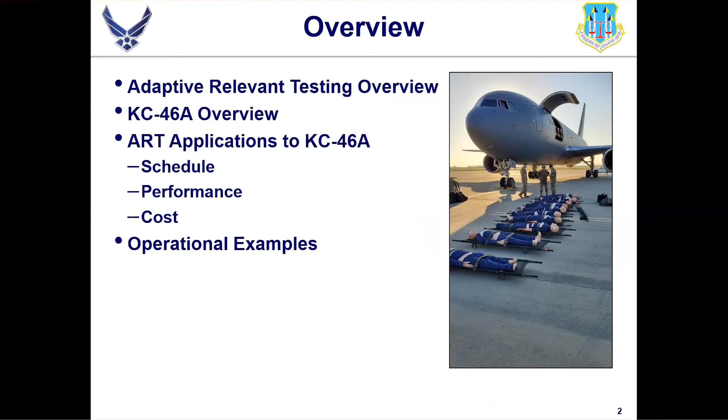So the purpose of this brief is to go into detail about adaptive relevant testing and talk about how the KC-46 team has used these AFOTEC principles in order to deliver capability faster to the warfighter at a cheaper, more efficient way compared to traditional methods. The traditional method I'm talking about here is essentially black box initial operational test and evaluation, where we wait till everything's ready. We go to test for 6 months. No one hears anything. No one gets any data until it's all finished and published in a final report. And then fixes can be made. So that's the traditional method - that's how we're trying to go away from that, and we're trying to use ART principles to do that.

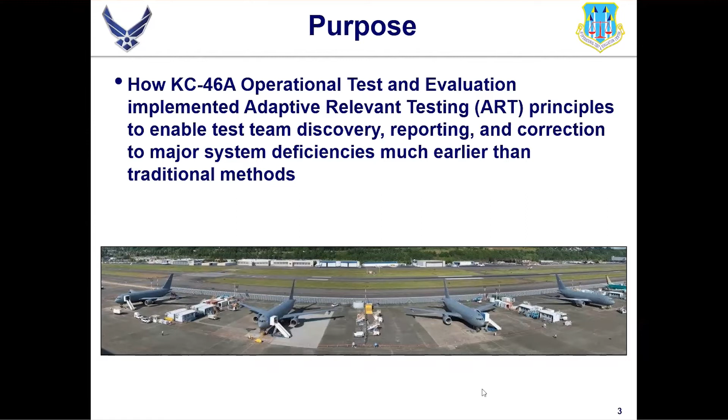So to start with, you're going to hear me talk a lot about the DT mindset and the OT mindset. Just kind of a blanket statement - developmental test, in my opinion, from an operational tester's view, is much more focused in the weeds, maybe not in the weeds, but they're focused on smaller minutia things.

They're looking at the capability production document. They're doing verification, saying does the boom fuel flow meet the criteria we set about when we wanted to build this weapon system?

Whereas the operational test mindset is much more of an operator and aircrew, mission-focused mindset where we're validating and saying, can we perform the mission? Rather than what was the fuel flow on the boom, were we able to give fuel in an operationally realistic time frame in order to complete the mission?

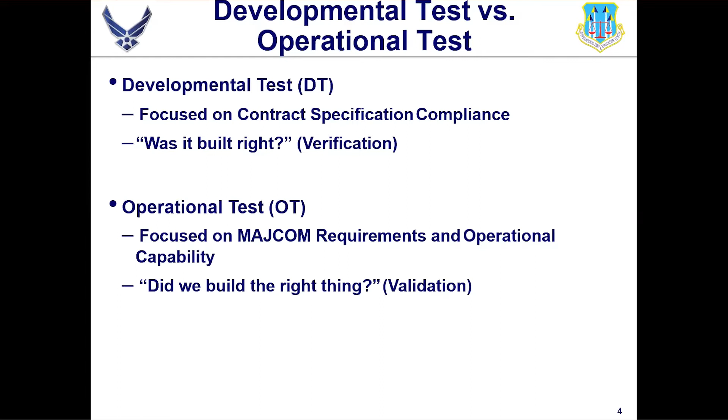So you're going to hear me talk a lot about the DT versus OT mindset during this brief, and that's kind of what I mean.

To begin, AFOTEC ART is based off of the 2018 National Defense Strategy from General Mattis, where he wanted acquisition programs to deliver performance at the speed of relevance. So you're going to hear me talking about delivering capability faster and smarter, as you see on this left-hand chart with this triangle, under the acquisitions framework of cost, schedule, and performance.

So to deliver speed of relevance with high performance, we want to discover problems early on that left-hand side. By doing that, we're going to allow us to fix problems earlier, which means we're going to deliver better performance to the warfighter with the combat capability in the middle.

On the right-hand side is kind of our cost side. We're going to reduce costs, and the way we want to reduce costs is we want to find these problems early. It's a lot cheaper to fix issues when, say, we only have 3 test aircraft to fix a problem on compared to a fleet of 180.

You've probably seen in the news that the KC-46 is replacing the boom, or the vision system. Programmatically, it's way cheaper to fix 20 aircraft than 180 aircraft. And that's kind of where the cost aspect comes into play.

Then the bottom triangle is the schedule part of the acquisitions triangle. We want to test earlier, faster, and smarter. We want to get the weapon system to the field faster, at a lower cost with higher performance compared to these traditional methods we've been using.

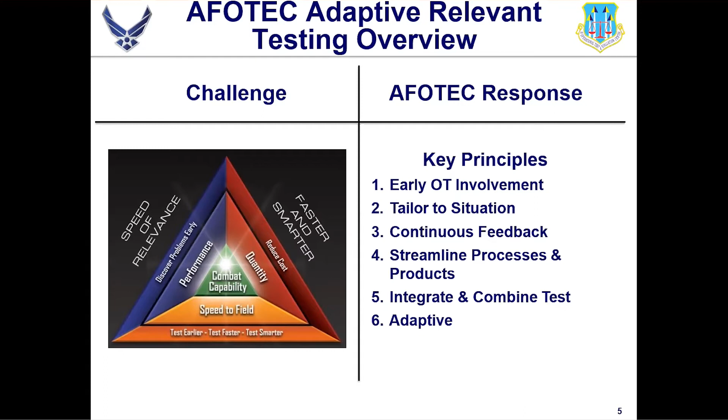But ART is really AFOTEC's goal for answering the national defense strategy of delivering capability at the speed of relevance.

So talking about the KC-46 now, just a brief overview. This picture here on the right-hand side is the concept of operations for the KC-46. Every acquisitions program in the Air Force gets one of these. Basically it's an overview of what we want the jet to do in picture form.

So we want it to do aerial refueling. We want it to be like a KC-135, which you'll see on the bottom, but we want it to be an enhanced version of that. We want to do airlift, have cargo and passenger airlift, and do aeromedical evacuation as well.

The key here that I really want to foot stomp, that's going to bring AMC and the tanker community into the 21st century, is all of the lightning bolts on the screen. It's our command and control aspect, our situational awareness—basically we want to have a pseudo AWACS mission set along with a KC-135 mission set.

That's what really separates the KC-46 and brings this enhanced mission concept: it's a tanker that does everything legacy tankers do, but also has all these new situational awareness and C2 capabilities that it can share not only with the Air Force, but jointly with the Army, Navy, and other friendly military partners. So that's the goal of the 46—it's a tanker plus.

And that's coming from the C2 aspect of it.

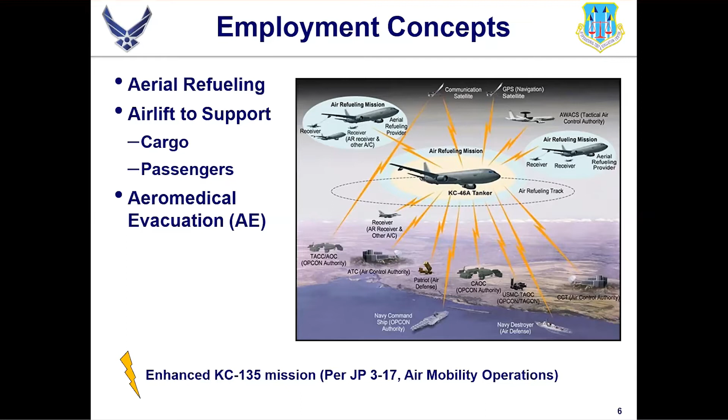Going into our test design a little bit, we use standard DOE methodology. We have 5 critical operational issues that I'm going to talk about here in a little bit, but each one of those 5 COIs are their own experiment. Each experiment has an 80% power level with a signal to noise ratio of 1.5. Pretty standard stuff. We have roughly 4,500 data points across 700 test events, and each of those 5 experiments has their own factors and levels that we're looking at in order to make sure that our conclusions are sound.

This also answers the questions of what this weapon system is supposed to accomplish. Flight tests are a primary methodology. AFOTEC headquarters approves our final test plan, but we also have DOT&E approval of our technical adequacy, and we work with advisors from IDA to help us with that as well.

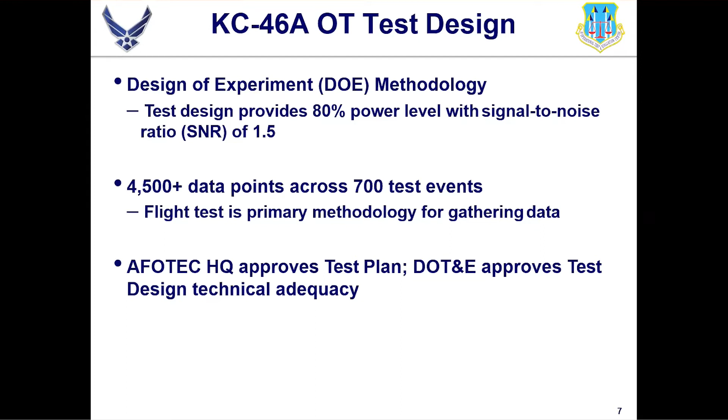Going more into our test methodology, our test is split almost in half: you have effectiveness and suitability. Effectiveness you can think of as operators, the air crew, the guys in the jet. This is the AR aspect. Our 3 critical operational issues, or COIs, on the left are AR (air refueling), airlift operations—cargo and passenger—as well as aeromedical evacuation. So when we're testing the effectiveness of the aircraft, these are the mission sets we're talking about.

We have 2 main ways of doing that: ground test and flight test. The primary means, once again, is flight test, but it's not just AR, not just fuel—we're looking at everything on the jet and how that enhances the mission. So does the lavatory work? There are going to be limitations to the aircraft if you can only be aloft for a certain amount of time because the lavatory capacity is low, or something like that.

Cargo and passenger operations—how do we load the jet? What is the cargo floor like? And then aeromedical evacuation operations as well: how much water can we hold for patients, how much oxygen does the jet hold, as well as ground operations like alert launch and things like that. So that's kind of what we're looking at when I say effectiveness—this operator mindset, this air crew focused perspective.

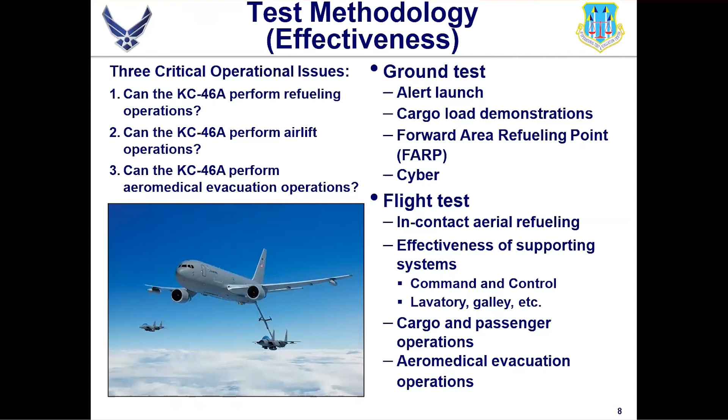On the next slide, we talk about suitability. This is maintenance. Suitability has two main critical operational issues, which again are their own separate test designs. We have: can the KC-46 be generated to meet mission tasking? That means, basically, can we perform maintenance on the aircraft to have it ready when we need it? And then, is it logistically supportable? So if the KC-46 breaks down in Hawaii, or breaks down in Germany, do we have the supply chain and the parts on hand to fix it, not only effectively, but efficiently and in low time.

The primary means of that is ground evaluations. We have maintenance experts out there running through checklists, running through publications, the interactive electronic technical manuals, and watching maintenance members perform maintenance tasks while grading the effectiveness of that—basically, can I perform a maintenance task, and can I get this aircraft ready to fly with the products that we have?

And then we also have analysis. If you're familiar with maintenance at all, we use G081 data, and we can get aircraft reliability, maintainability, and availability. We use these typical maintenance metrics along with sustainability and the supply chain in order to rate both of these critical operational issues.

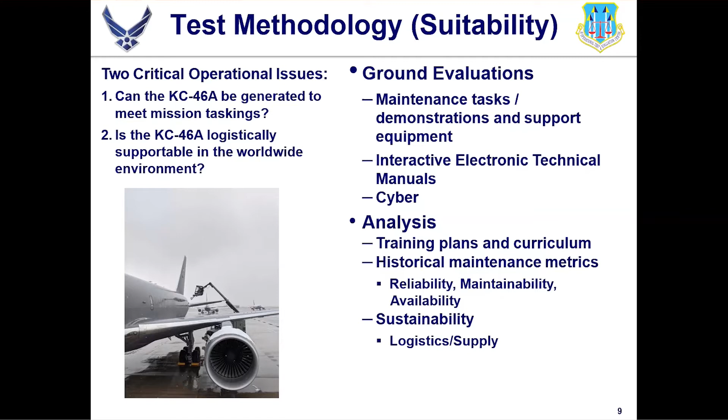So now that we have a background on the KC-46 and on ART, I went quickly through it, but there are a lot of examples at the end that I want to talk about more in depth.

We can talk about the acquisitions triangle and how we've applied it to the KC-46 program with this methodology and test framework. The first thing we want to do is test systems when they're ready, so we look at our schedule. The KC-46 is a great example, based off of FAA certifications. The DoD has 17 different receiver aircraft they'd like the KC-46 to be able to refuel. When we started operational tests, there were only 3 certified by the FAA to test: the F-16, the C-17, and the KC-46.

In a historical IOT&E, we would have waited until all 17 receivers had been certified by the FAA to test, which still hasn't even occurred, so we wouldn't have even started testing yet. But because we started early, we were able to test those 3 receivers. While testing them, we've gotten more certifications along the way. We're still not at all 17, but it's allowed us to test while we can and move the schedule left. We had 22% of our test points completed before the official start of operational test, because we're pushing that schedule left, trying to identify issues early and lower costs.

Some limitations of this - the biggest thing we found is the contract type. The KC-46 has a firm fixed price contract, which makes it really difficult for us to make changes when we have new discoveries, or even to get access to things we'd like to see. When Boeing was doing contractor testing, we missed out on a lot of data because we couldn't be there to be a part of it, since it wasn't written into the contract.

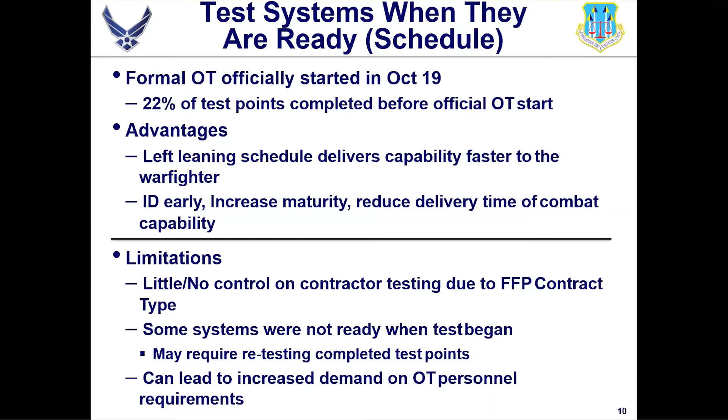There's just a lot more demand for people, for longer than expected, compared to a historical IOT that lasts 6 months, where everyone's there the whole time. We're going to lose basically half our team, if not our whole team, in the next 6 months to a year by the time everyone PCSs - just the nature of the military. So there are definite limitations to pushing things left: you lose a lot of your expertise throughout the test.

Now I want to talk about identifying issues early - this is the performance aspect of things. By testing things incrementally, by testing them earlier, we're identifying issues earlier. The buzzword I always hear is that we want to characterize the operational envelope of this aircraft. Whether it goes good or bad, we want to let the warfighter know what they have.

The lessons we learned from the C-17, while not a one-to-one trade to a B-52 that we might get the cert for 6 months later, still matter - the aircrew is training with the C-17, they're still learning about the system, and we're still getting data on it. We can provide those lessons learned to the B-52 when the time comes, so the warfighter is more prepared to do their job.

Another big thing I want to foot stomp is integrated testing. Developmental tests have their own DT test, and we have our own OT test, but we really want to blur the lines between those tests and bring them together. We want to work with DT more often, and the KC-46 has done this - I have an example later about how we worked with DT and how early OT involvement with DT is beneficial for everyone. Some limitations are that we can have rediscovery of DT data.

This is mitigated by effective integrated testing. The Tactical Situational Awareness System, or TSAS, is basically the hub for a lot of the C2 systems on the KC-46 Alpha. We've learned there's a lot of issues with TSAS and the interface with the aircrew. We found that out, and then we talked to the DT guys, and they had the same issues. So we basically doubled up on testing. If we had effective IT with TSAS, we would have known that prior to even testing, and we wouldn't have wasted range time.

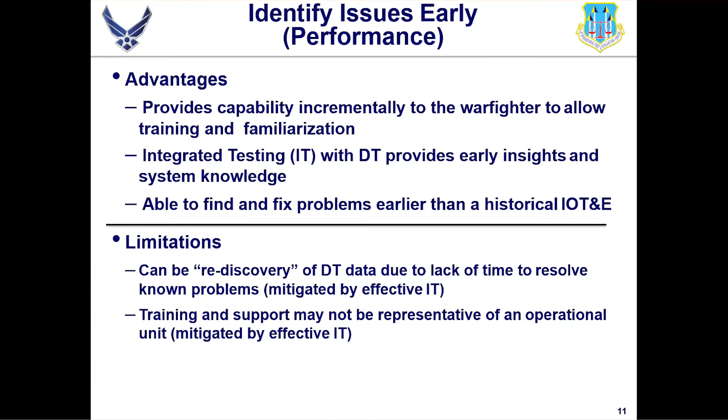And then lastly, we're trying to reduce costs through our optimized testing. I talked about this a little bit already. We're looking at programmatic costs here. We want to decrease the long-term costs by finding problems early, fixing them early when we only have a few aircraft, so we don't have to send 180 aircraft to depot to get fixed over 5 years.

In addition, we want to be on the figurative knife's edge of our testing. As a lot of people in this community know, usually more data is better, especially when it comes to power and statistical rigor. We want to be on that knife's edge where we get the signal to noise ratio, the power we need, but we don't want to waste testing just to get something done to do more.

Some of the limitations, especially with the figurative knife's edge of testing, from my standpoint, is explaining to people why we need to do a 4th or 5th or 6th test when the operators have that mission operational test mindset of, hey, I've already done it 3 times, I know the outcome, why do we have to repeat this? That's really hard from an analyst standpoint to explain how statistical power and confidence matter and how we need to increase our sample size.

In addition, the long-term cost of the program might be lower, but the teams are going to be in place longer, increasing short-term costs in terms of TDYs and things like that. And then lastly, if we're not efficient, if we don't have good integrated testing, retesting and rediscovery of test points isn't the most efficient. It's going to increase your costs.

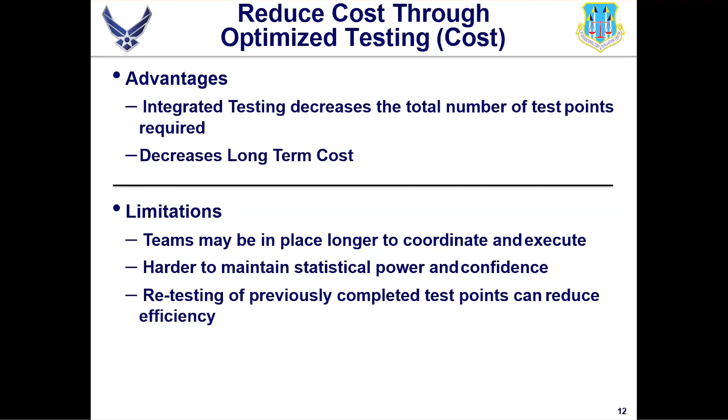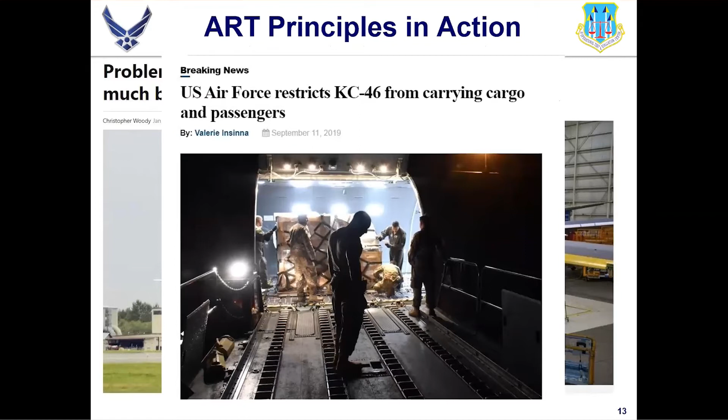So I want to talk about some examples now. This slide was supposed to build, but I don't know if you guys read about it. It was pretty big, obviously on the KC-46 team it was huge, that there was a Cat 1 emergency deficiency report published due to the cargo floor unlocking during flight. Here's some news articles that were supposed to build. On this next slide we go into detail, and you can see the news articles at the top, something I pulled off of Google from a quick search. If you want to find out more, you can read those as well.

The background is that on the KC-46, one of our critical operational issues is that we want to be able to do airlift and carry cargo and passengers. So the cargo floor of the KC-46 has these different locks and latches in order to secure pallets onto it.

So they're equipped with a quick release that should be easy. Sometimes you're moving thousands of pounds of gear and people, and you want something that's quick and easy to hook into the floor, lock, and be safe. The quick release has a tactile indication of lock, and it clicks when the user turns it. I'll show you a picture on the next slide.

The issue we found is that these locks securing the pallets to the floor were coming unlocked from the floor during flight. Technically prior to official OT start, we had a test boom find this out on a test flight. We were there early testing these capabilities, and by being there early, we were able to ID an issue early and put a deficiency report out to get it fixed.

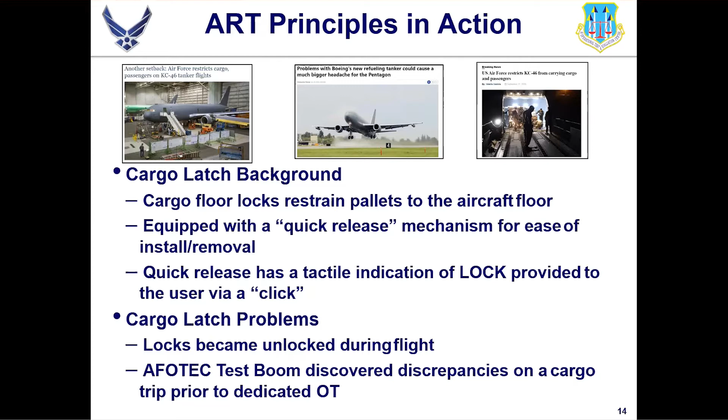By us being there early, testing early, identifying this deficiency, and reporting it, we were able to get a fix within 3 months, when if we had done a traditional IOT&E, it would have taken 6 months for anyone even to find out it happened. In addition, we were testing throughout the whole time the fix was being developed. We weren't flying with cargo because that was unsafe, but we were still able to do AR testing, TSAS comms testing, and all this other stuff we could deliver to the warfighter incrementally, even though we couldn't give them cargo.

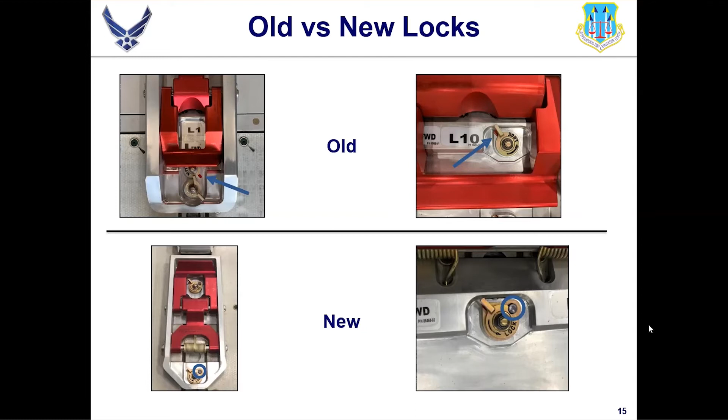Another example that really brings the operational test mindset to light is the aircraft performance tool. In the acquisitions framework, we as OT do operational assessments throughout developmental testing. Until May of 2016, TOLD, which is takeoff and landing data, was provided using a Boeing FAA certified dispatcher. That's significant because takeoff and landing data is required in terms of safety of flight for takeoff of every aircraft.

If you have an engine failure or any type of emergency, you only have so much runway left that you can stop in order to be safe. So what TOLD does is give you those speeds and times, essentially, where you can say, I have enough runway left to stop, or if I have an emergency, I have to go into the air and figure it out there. So it's really a safety of flight issue to not have correct TOLD, and not to have accurate TOLD.

For Boeing, it wasn't an issue because they just used their dispatchers, printed it off, and gave it to the test pilots to go fly. But from an operator mindset, from a mission-oriented mindset, that's a huge issue because the Air Force operates all over the world. We don't have Boeing dispatchers to print us off TOLD data, and it's essentially required for this aircraft to do any of its missions.

So in our operational assessment, the OT folks wrote up that there's a major operational deficiency of the aircraft because it cannot calculate its own TOLD. As a result, no OT testing was held back from it, no DT testing was held back from it. And in January of 2019, when the first KC-46 was delivered, it calculated its own TOLD using APT.

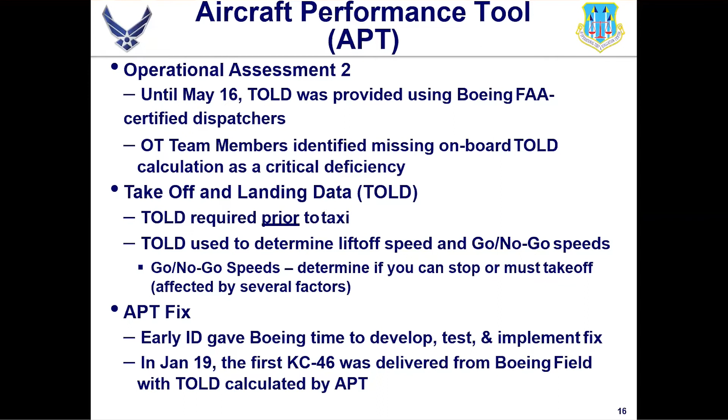So, lessons learned. Sorry, I went kind of fast. There's just a lot of information, but the biggest lessons learned I want to foot stomp...

...are that integrated testing is critical to everything. If we want ART, if we want to deliver at the speed of relevance, we need to remove this OT versus DT mindset. We need to test together, everyone working together. The DT mindset is critical in order to get a working weapon system, the OT mindset is critical to get a working weapon system, and we need to work together and just test aircraft rather than be separate and different.

In addition, no system is 100% ready. We have to test what is available. Nothing's on a jet aircraft like the KC-46 — it's a system of systems, there's thousands of systems on it, millions of parts. Nothing is always going to be 100% ready, so you have to test what is available when you can.

And the cargo example is a great point of this, where we were able to test for 3 months when a historical test would have shut down.

Next, big thing is contract type. When you're working on these weapon systems, the type of contract you have can severely limit you until the contractor allows you to look at it. The firm fixed price contract was a huge limiter on the KC-46.

And lastly, we want to communicate our results at an actionable level. Nothing that we discovered, nothing that we found, would have mattered if we communicated it a year from now, or even 6 months from then. The fact that we do daily sit reps with stakeholders, and periodic reports every 3 months, gives you basically a snapshot in time of where the KC-46 is, and allows decision makers and stakeholders to have accurate data on the jet in order to fix what's wrong and plan for it in the future. So, sorry, that was pretty fast, but I had a lot of information.

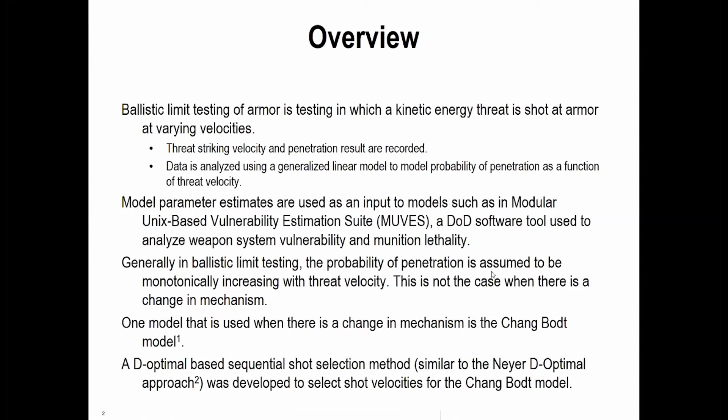So you have the V50, which is the velocity at which there's a 50% probability of penetration, and sigma, which represents the slope of the response curve. This work focuses on applying the D-optimal approach to a more complex Chang-Bodt model.

All right, so what do I mean by a change in mechanism?

Okay, so diving right back in, a change in mechanism is when the threat-target interaction behavior changes over a given velocity range, such that probability of penetration is no longer monotonically increasing with increasing velocity.

So shatter gap is probably the most commonly cited example. At low velocities, the threat stays intact and the armor stops the threat. At intermediate velocities, the threat may stay intact but penetrate the armor, or it may shatter and not penetrate the armor. And at high velocities, the shattered threat has sufficient energy to penetrate through the armor.

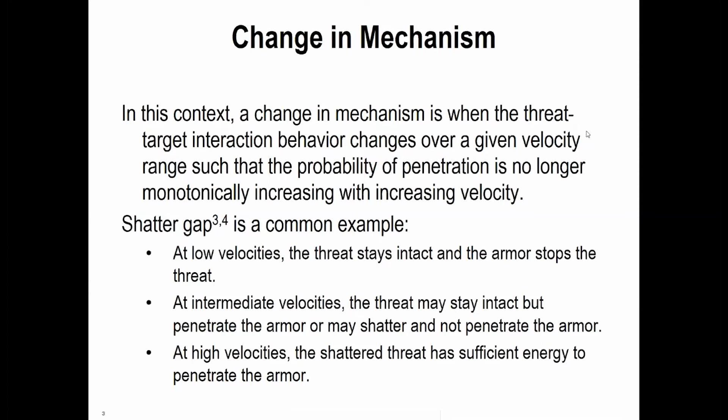Okay, so here's kind of a comparison of response with a single mechanism versus response with two mechanisms. In both instances, we are modeling the probability of penetration as a function of velocity, shown by those red lines on the screen. Individual data points are shown in blue.

So for the response with a single mechanism on the left, probability of penetration is monotonically increasing. Basically, it just always increases with increasing velocity. But for the response with two mechanisms, it increases, decreases, and then increases again. We also want to point out that the data points are both circles and X's, and those are just denoting the two different mechanisms.

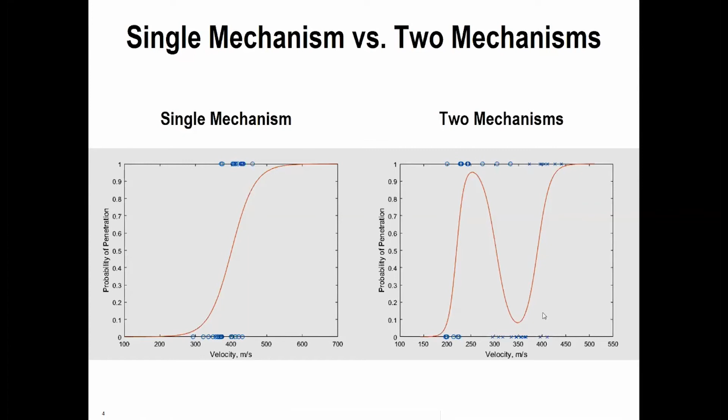So a couple of quick notes. Several methods have been proposed for modeling the change mechanism. So why choose the Chang-Bodt model? This model makes more intuitive sense than, say, a higher order polynomial, and is more consistent with how we model a single mechanism. The Chang-Bodt model allows for a certain amount of complexity that is necessary to allow for different slopes of the two mechanisms, compared to say a cubic fit. And the Chang-Bodt model appears to give more conservative estimates for extreme quantiles than higher order polynomials or splines.

Okay, so a couple of test considerations. Can the penetration mechanism be determined for each shot? Possible methods include both high-speed X-ray or post-shot X-rays. And if we can determine that mechanism, then we can use that information in analysis.

Secondly, how much overlap is there between the mechanisms? So what do we mean by that? Is it easy to see just by looking at the completes and partials that there's two different mechanisms? That would occur if there's not a lot of overlap. Or does it just look like one big mess of mixed results? That would be a lot of overlap. So if there's a lot of overlap, then determining the mechanism for each shot is helpful and sometimes necessary.

It can be easy to overfit a model, so typically we want physical evidence of a change mechanism instead of just relying on statistical methods such as information criteria. Lastly, if there's a lot of overlap, then it can be easy to miss the presence of one of the mechanisms in cases when you're not able to determine them. If there is not a lot of overlap, so it's easy to determine which mechanism is which, then knowing the mechanism is still preferred but not as critical.

And then finally, what if one of the outcomes is rare? In the example given here, a threat tends to shatter before an intact threat would be likely to penetrate. So if it's super rare that it can pretty much be ignored, then we can model that with a single mechanism. But in cases where it's maybe like a 10% or 20% chance of penetration, so it's still relevant, knowing that mechanism is critical because it would be really easy to, in this case, miss the intact round mechanism.

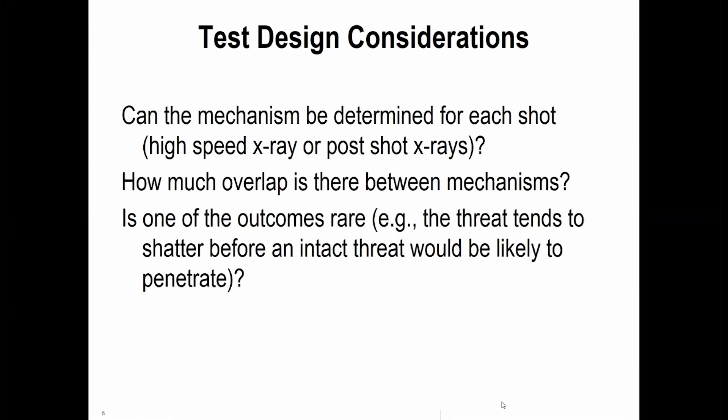Let's see. Okay, it looks like...

Oh, sorry, that's an old question.

I'll keep moving then. So that brings us to the likelihood function for the Chang-Bodt model. Why is the likelihood function important? Maximum likelihood techniques are used to iteratively determine our parameter estimates for our model.

This work focuses on a d-optimal method for shot velocity selection. A d-optimal method selects points to maximize the determinant of an information matrix. The information matrix is the negative expectation of the second derivative of the log likelihood function. So the likelihood function provides a foundation for the test method and the analysis. That's why it's important.

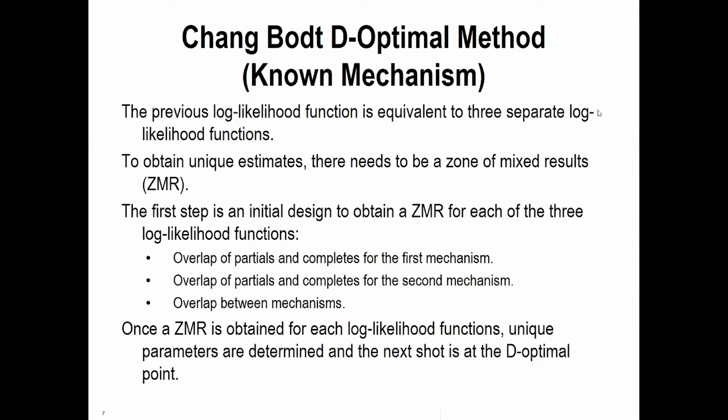To obtain unique estimates for our model, there needs to be a zone of mixed results. To that end, we use the initial design to get an overlap of partials and completes for our first mechanism, an overlap of partials and completes for the second mechanism, and an overlap between the two mechanisms. Once we obtain the three zones of mixed results, unique parameters are determined. The next shot is the D-optimal point.

So here's a quick example of what all that means. Along the left y-axis is the probability of penetration. In blue we have our individual points. Circles represent our first mechanism, the X's represent the second mechanism. The zeros along the bottom x-axis are partials, and the ones are completes.

Then we have the response curve based on the Chang-Bodt model, shown here in blue. Along the right axis is the determinant of the information matrix, as a function of the next velocity. This helps us choose the next velocity simply by picking off the peak of this orange curve. So our next shot in this case would be 255 meters per second. Shown here we have 4 peaks, but there can be up to 6.

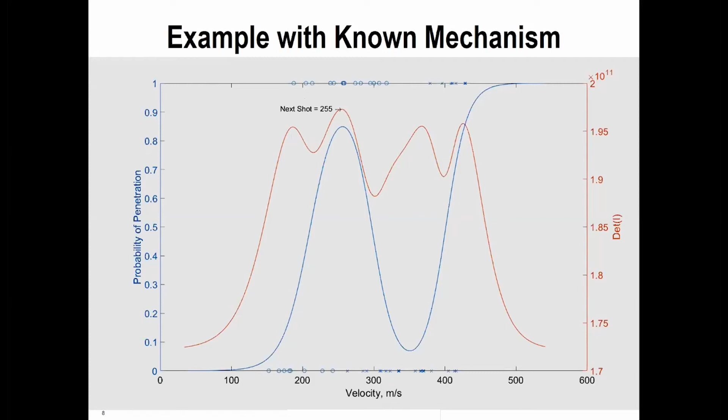To evaluate the performance of this new test method, a simulation study was conducted. We used 4 true sets. In this case, the mu's for the 2 different mechanisms are symmetric about the mu for the mechanism probability function. We explored deltas varying from 1 to 4. The underlying scale parameters are all equal, so all the sigma values are equal. The probabilities P sub 1, P2, and P sub m all followed a logistic distribution. Initial guesses are exact, and we explored sample sizes varying from 40 to 100 in increments of 20.

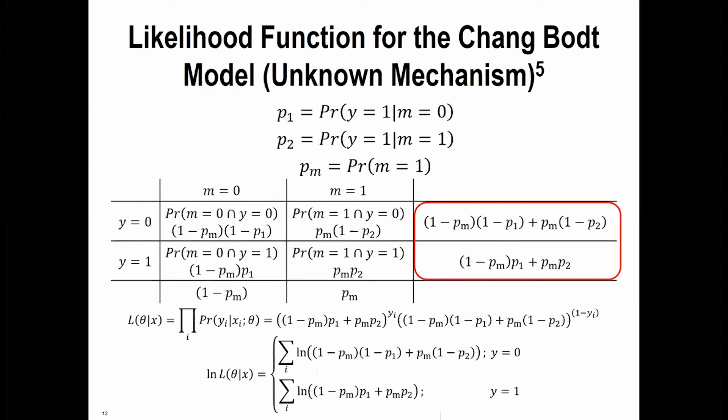Okay, so in situations when there's a little overlap between the two mechanisms, this unknown mechanism approximates that. As before, initial design is used to achieve overlap of the data. And since we don't know the mechanism, instead we achieve three regions of overlap in partials and completes to approximate the known mechanism result. A couple quick notes here.

This is a more challenging optimization problem than earlier. So a method was used to quickly assess the initial guess so that basically we don't have to wait very long between shots. Also implemented some algorithms to try to resolve a lot of convergence issues, but sometimes we still had convergence problems.

For these simulation studies, I think I ran 1,000 simulations for each of the conditions. Running that many, you can run into some weird situations. So as a catch-all, the optimal points were based on a cubic fit when the convergence failed. However, when we did get convergence, the optimal methods or the optimal points based on the Chang-Bodt model were used. So this approach is not recommended when there's a lot of overlap between the two mechanisms or when one of the outcomes is rare, as we previously discussed.

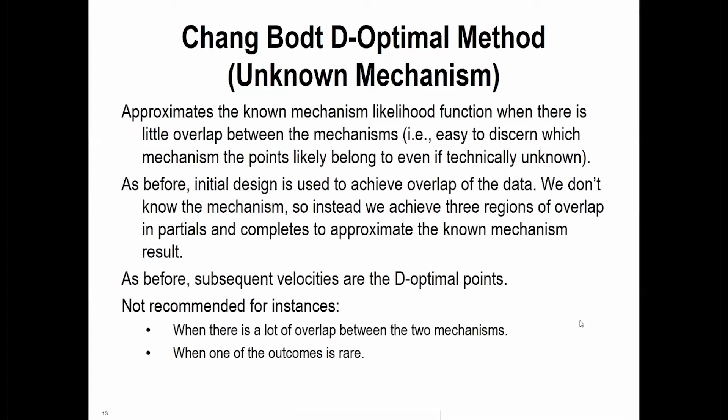Okay, so here's an example, this time with the unknown mechanism. Along the left axis, again, is probability of penetration. This time, our data points in blue are only circles because we don't know the difference between the two mechanisms. And then our curve, again, is a response curve based on the Chang-Bodt model.

Along the right axis, again, is determinant of the information matrix in orange. In this case, that's as a function of the next velocity. So again, we pick off whichever of these peaks are highest. And if we look at the data, we see that the lowest velocity wound up being a complete. So the algorithm correctly picks a low velocity of 139 meters per second as our next target shot velocity.

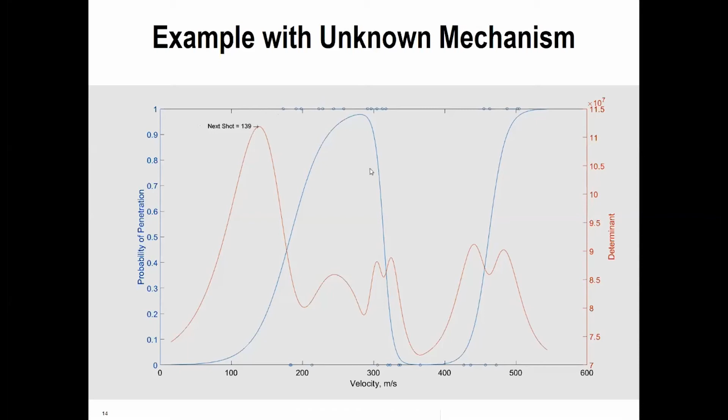All right, so again, we did a simulation study just to see how this method performed. This time we varied delta from 3 to 5 instead of 1 to 4, because those instances where there's a lot of overlap, we don't recommend this method for those not knowing the mechanism. So everything else is similar to the previous simulation study. All these P1, P2, and P sub M all followed a logistic distribution. All of our initial guesses for the 3 mu's and the 3 sigmas were exact. And again, we're looking at varying sample sizes from 40 to 100.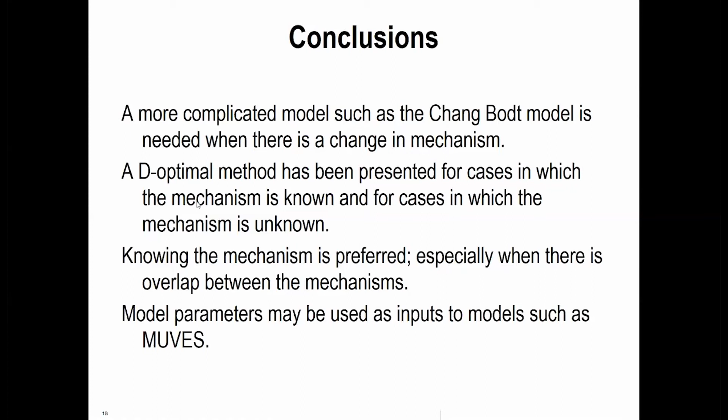I'm not too confident we could do it in cases where we don't know the mechanism, just because we want to be able to take advantage of that chi-square distribution. There might also be problems with local maxima that would make it difficult to calculate these.

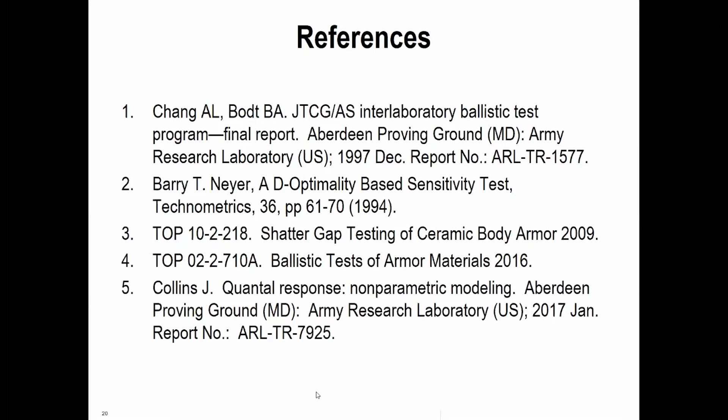Can you explain root mean squared error is smaller with smaller sample size? I guess as your sample size increases for a given delta, all these root mean square errors also decrease.

And then let's see how that compares to the other one. I don't think they're on the same scale. Yeah, they're not really on the same scale, so it might be harder to compare.

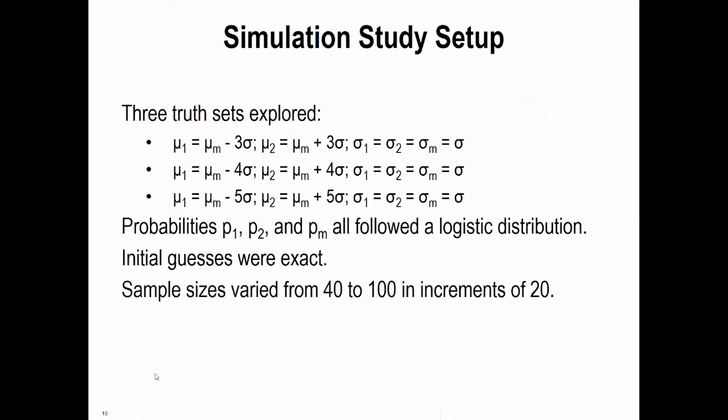But generally speaking, if you know the mechanism, then there's less uncertainty. You should be able to estimate the parameters better. Hopefully that answers your question.

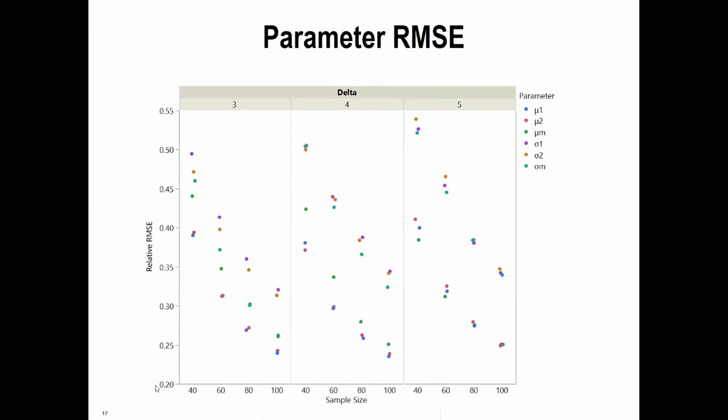And the CB seems to outperform splines when the mechanism is unknown? So yeah, I'm sorry if I wasn't clear. These were only developed so far for the case where the mechanism is known. I'm not convinced I can come up with a likelihood-based confidence interval when the mechanism is unknown.

So again, it's based on nested models, and if we went all the way back, we'd see that we don't really have nested models. It's constructed differently in the case where the mechanism isn't known. So we wouldn't be able to take advantage of being able to just add up those chi-squared distributions to combine them, or even calculate them. I don't know how I would do it for a case where I don't know the mechanism.

So if I consider a nested logit structure when the mechanism is not known, I'd probably like to talk to you more offline about that.

That would be great if you could give me some more information as to what you mean by that. All right, thanks, Lenny. And yes, we can connect you with Jay Dennis to discuss that further.

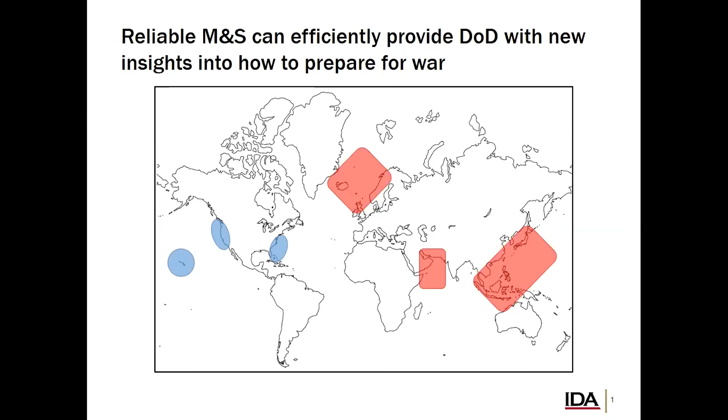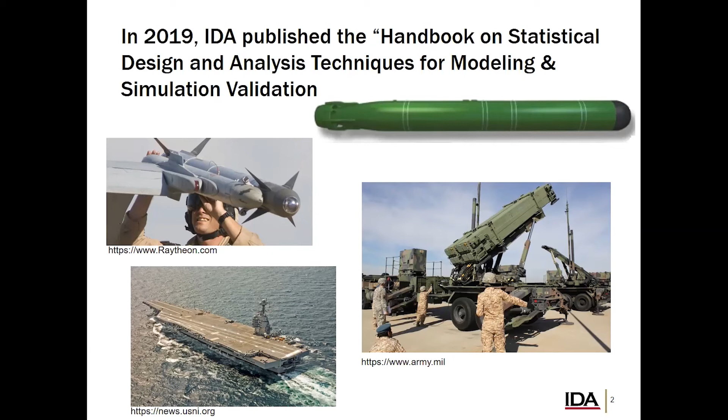So the Mark 48 torpedo is shown on the top, and that's what I'll be talking about today. But there are other programs as well whose operational testing plans to have M&S in it. There's the air-to-air missiles like the AIM-9X and AIM-120 AMRAAM, and also the Patriot missile. But in addition, in a non-explosive way, the CVN-78's operational testing plans to model the sortie generation rate. So if you're interested in any of these, keep your eyes peeled down the line.

One very appealing aspect of M&S is that you can save a lot of money, and of course learn potentially more than you ever could based on in-water testing alone. And so if we can validate the ECWAF, and that is an if because we're in the middle of it right now, we can potentially save a lot in resources.

So what I show here on this plot is the cost of OT on the left axis for 3 different torpedo variants. APB 4, 5, and 6 are just different software and hardware configurations. The blue data shows the approximate cost for an in-water run, which I estimated about $200,000 per run. And the orange data is the M&S, which is about $200 per run, so a lot less.

And if you look at APB 4 and 5, you see that both of them have in-water operational testing exceeding $25 million. If you squint your eyes for APB 4, you can just make out a sliver of M&S done there. In APB 5, we dramatically increased the amount of M&S we're doing. But we have to have a large amount of M&S and in-water data because APB 5 is where the validation is occurring.

The payoff comes down the line with APB 6. And that's where, again, if we can validate, we plan to reduce the number of in-water firings by more than half. We're really shifting the statistical burden of OT to the simulation.

I like to point out, though, that we could never completely get rid of the in-water events, no matter how good the simulation is, because there are certain things that you learn from in-water events that you could never learn in simulation. But what we can do now is focus our resources on areas where, say, we don't trust the simulation as much, or scenarios that we know have been historically challenging for the torpedo.

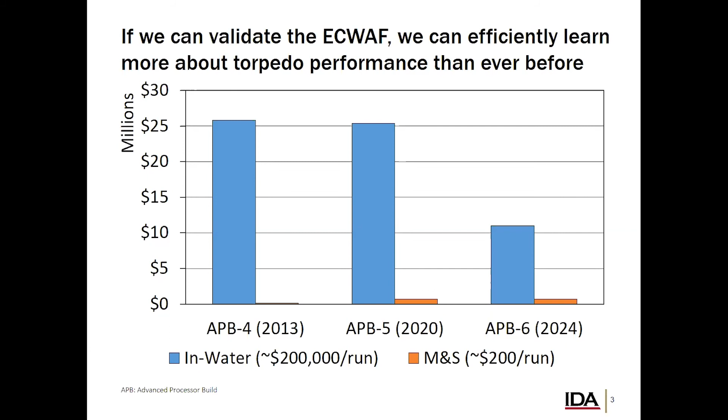So just a little background on torpedoes. It's the submarine's primary weapon to take out other submarines and surface ships. And every so often, the Navy releases a new variant of the torpedo, whether it's hardware or a software upgrade, and we have to test it before it's fielded.

And of course, because we have to test it, we encounter the usual obstacles that weapon systems have. Testing is, of course, expensive. Safety is always paramount in testing, so we can't do everything we want. But one thing that's extremely difficult, I think, for our community is the time it takes to do it. There are a limited number of attack submarines out there, and to schedule 2 of them to appear in the same body of water at the same time is a huge challenge, and it's only going to get more difficult.

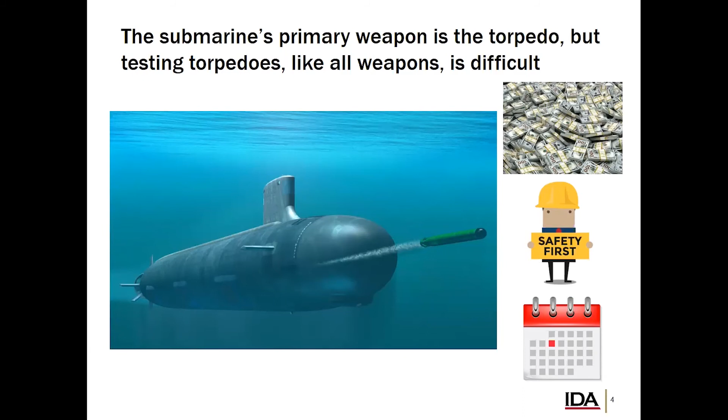But these are obstacles that M&S can overcome. So this is what the ECWAF looks like.

It's a hardware in the loop model. On the top of that bench are 3 torpedo, sort of the brain part of the torpedo. That's where the sonar signal processing is and the tactical software. And below the bench is the computers that make up the actual simulation. So they're connected to it by a series of cables.

You can kind of imagine it's like putting the torpedo in the Matrix, like in the movie. The simulation has to model the environment, the targets in it, and how they move, and also how the torpedo moves and the sound that it puts into the water. It's an extremely complex simulation.

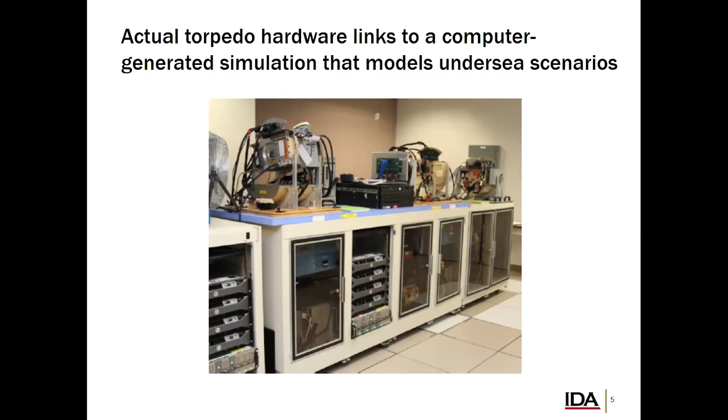One key upgrade to this simulation is that it is now environment-centric. It's been around since the 90s, but it wasn't always an environment-centric simulation. And so we know from historical testing that environmental factors play a big role in how well the torpedo performs, but they are notoriously hard to model.

Open ocean is very different. It's a much simpler environment. If the torpedo sees something, it's most likely going to be the target. So it's easier to model. It's also just easier for the torpedo as well.

So focusing in on the validation itself, we're in the middle of it right now, and I think it's been very successful. And there are many reasons for that, but I've distilled it down to 6.

The first is that there's been a strong Navy and OSD investment in the ECWAF's development and the VV&A. It was never a last-minute decision to make the ECWAF environment-centric. This was started about a decade ago, upgrading the computer hardware to make the ECWAF more trustworthy, and we know we're not getting the payoff until the next variant.

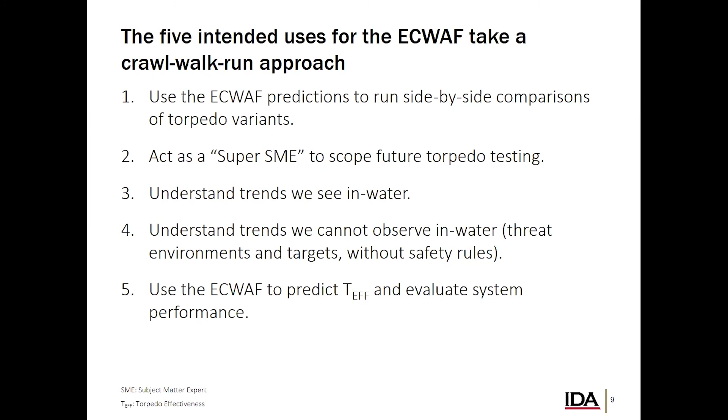The approach we're taking in this validation is a machine learning or statistical learning approach. We're validating the ECWAF in the general case rather than only specific cases. If we were doing it only in specific cases, we'd have to press the 'I believe' button for everywhere else. But what we're doing is validating everywhere.

There are 3 steps to this. The first is to do your ECWAF runs. We get together and generate our designed experiments. The experts at Newport run the simulation and give us a really nice, tidy table afterwards. The data looks like a series of conditions that leads to a hit or a miss. In the second step, we create our predictive emulator.

Another term for this is a meta model. It's a mathematical model that describes the computer model, and this is pretty much the T effectiveness function. We use statistical techniques like logistic regression to build this emulator. And what we get is not a hit or a miss, but a probability of a hit.

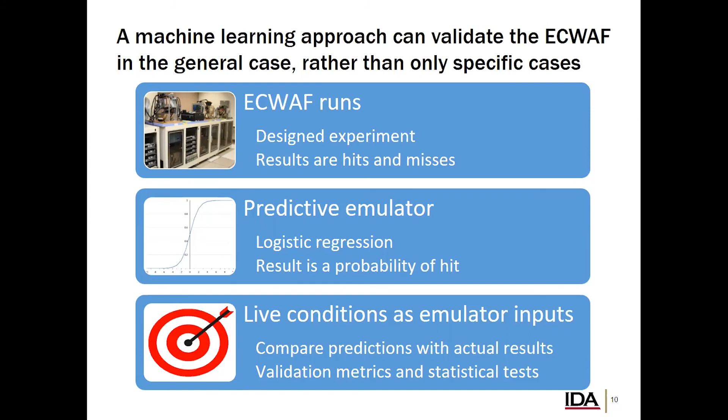The third step is where the validation occurs. That's where we take conditions from actual in-water events and plug them into the emulator. What we get is a prediction that we can compare with the actual outcome. I'm going to share with you just a handful of the validation metrics that we're looking at.

For those of you with a machine learning background, this is sort of like cross-validation. Our ECWAF simulations are the training set, and our in-water runs are the test set.

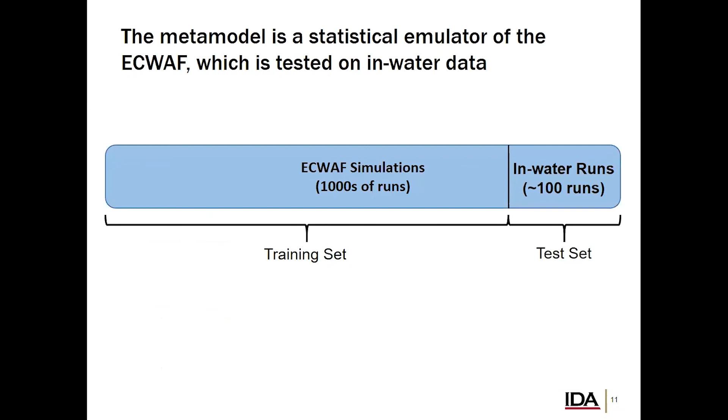We're also doing this in, I think, a key to success here, which is a 2-phased approach. That overall reduced risk and gave us an opportunity to learn. The first phase I look at as a rehearsal of that 3-step process.

In this phase, we used existing data with the historical torpedo. The Navy has a very well-organized torpedo database, and we used those historical runs to do a dress rehearsal of the validation. So we're not asking for any new in-water data, just simulated data. There is a limitation here, which is that historical data doesn't quite span the operational space as much as we'd like, but it's a rehearsal.

One of the two main outputs here are factor screening and lessons learned, which we implemented before going to the second phase, which is the same three-step process, but with the new system.

This is the torpedo that's currently under test. The biggest difference here is that for the in-water test, we used design of experiments, so it spans the operational space better than the data in phase 1.

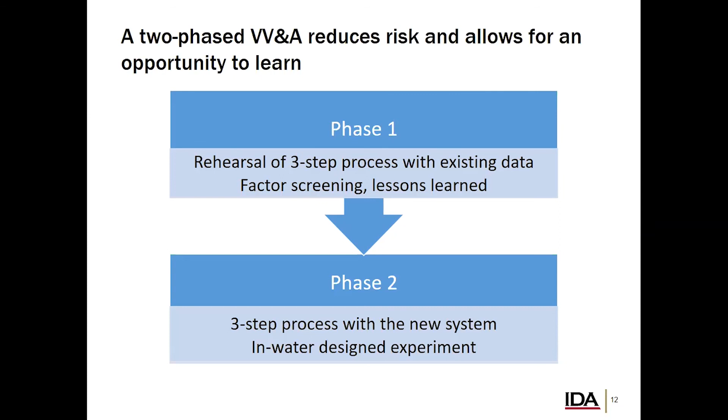There's a lot of statistical design here, both for in-water and the ECWAF. I'm going to share with you just how large the operational space is for the ECWAF. One of the first steps in DOE, design of experiments, is to identify your response variables, or what I call these important outcomes here. The T effectiveness, and what the sailor cares about, is hit or miss.

But we want to make sure we're hitting and missing for the right reasons. So we look at secondary outcomes like the false alarm rates and the acquisition ranges. Then we identify the factors that impact those outcomes: evasion tactic, target type, and the exact details of the environment we're in. For the simulation, we actually have 14 factors, so it's quite a large operational space we're talking about here.

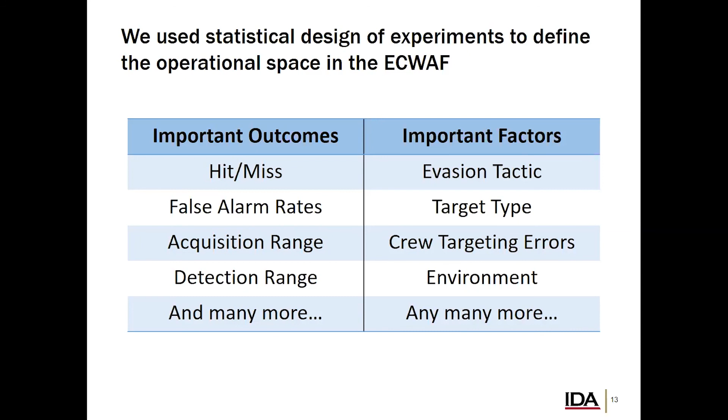So we have our factors on our DOE. The Navy, the analysts at Newport, run the simulation, we get the data, we do logistic regression, and then comes the validation. I'm going to share with you some of the metrics that we used—there are many that exist, but I'm just going to share 4 of them.

So how'd we do in phase 1? I think the results were quite promising, but there was a limitation there. Overall, the accuracy was high, 71% of the time the prediction was correct. The specificity was 32%, which left something to be desired there.

It looks like the ECWAF is over-predicting performance. Now, I think there are some very good reasons that this number should be higher that I'm not going to get into in this brief. For sensitivity, it was quite high at 83%. So if a hit occurred in water, it was likely to predict it.

One thing I want to say here is that I don't expect any of these numbers to ever be 100%. These are probabilities, and if there's a 30% chance of a torpedo hitting, we would predict a miss, but there's still a 30% chance of a hit. So we'd never expect these to be perfect.

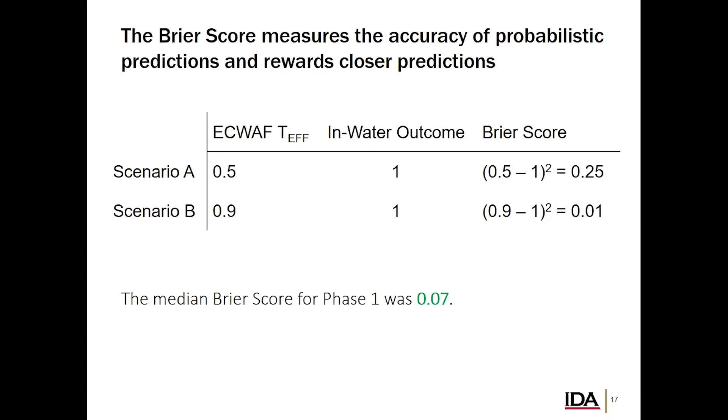We had an opportunity to make some changes because of this two-phase approach. One of the changes we made was moving from a factor screening design in phase 1 to a space filling design in phase 2. So this applies to continuous factors only.

For a factor screening design or a central composite design, you have your operational space is still just as large, but you're focusing your test points at the boundaries with some center points. In phase 2, in that space filling design, you really fill in the interior. We would only have done this because of that first phase using the factor screening design. Second phase, we have, I think, better predictive power here.

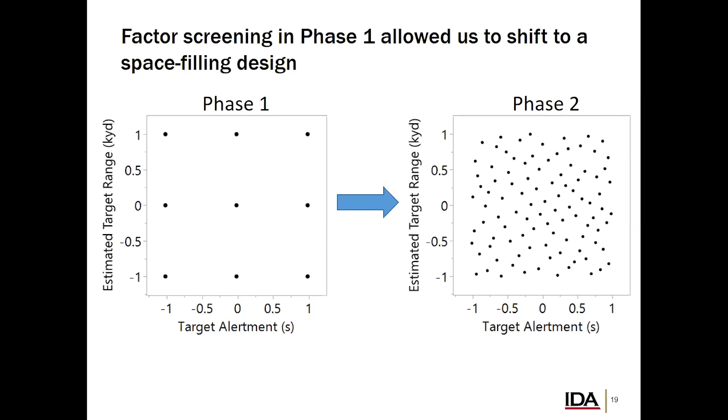Another change we made was that we went from one big design in phase 1 to 3 designs. So we have 400 deep water simulations, a much larger number of shallow water simulations, and then a pretty small design of threat models and threat environments. This is actually a very efficient use of our resources, because shallow water is hard to model, and it's also hard for the torpedo. So we're really narrowing in on where we can learn the most.

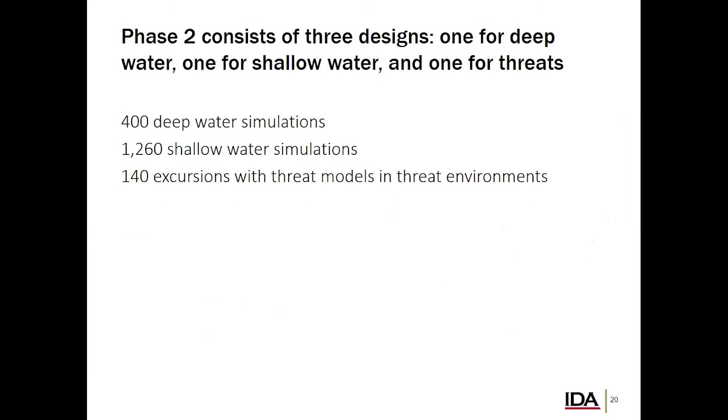So this is the last slide of my talk. The way I envision this ECWAF emulator is one that will evolve and constantly improve. I talked about how the ECWAF data is the training set, but after we validate, we can add all historical data into that training set and make new predictions. And then as new torpedo variants come in, the model can continue to learn from that and become more and more accurate. That's what I prepared for today.

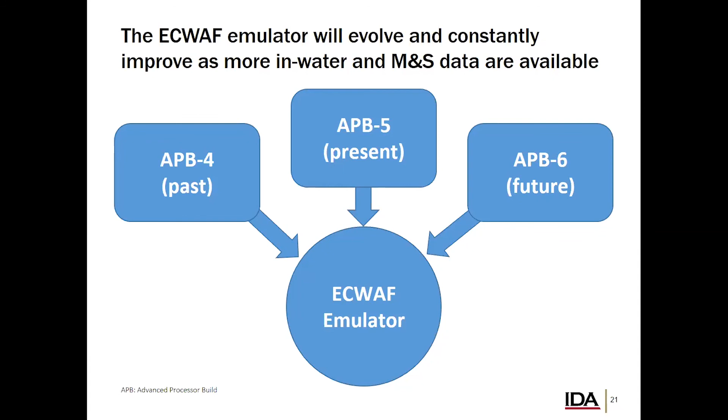I think there are a lot of ECWAF analysts on this call, so if they have any insight on that, I'd recommend they jump into the chat.

And then there was another question somebody asked about, so is miss distance something that you guys have considered instead of hit/miss? Would that be informative?

That's a great question, because continuous metrics are best. So for some fixed C, the miss distance less than C. The torpedo it's really an autonomous vehicle, so if it misses, it can turn around and find the target again. So in addition to that, it has to be close enough - I guess that's what Melissa means by fixed distance C. It has to be close enough to fuse.

And there is a lot to learn there, but typically with the torpedo, I think if it's close enough to a target, there are very few near misses. It's mostly - if it's not going to hit the target, it's during the search phase typically. It's because it can't find it initially, or if it gets really close, I mean, it's pretty reliably going to be successful.